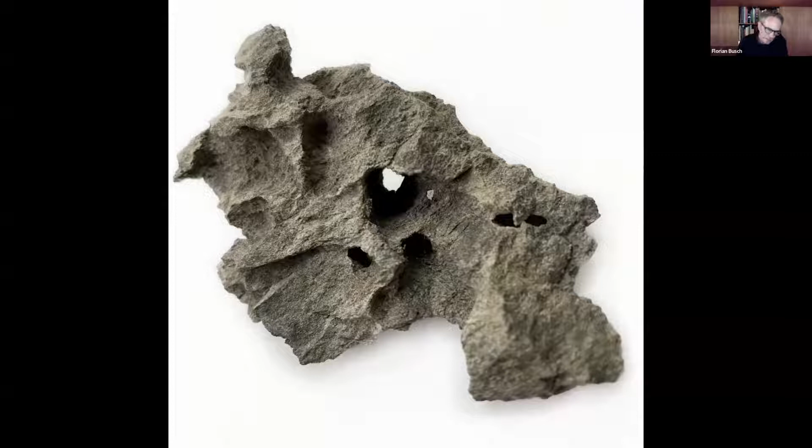Biology has become indispensable for architecture. Architecture has also become indispensable for biology in mind. And just looking at these images of a stone, of a coral, of a wasp's nest, or of the architecture of soap bubbles, you may be beginning to spot the tendency here.

The title was kind of a spoiler: formation, from form to formation. The processes of formation in these four instances that we just looked at are becoming quicker and quicker. Stone takes a long time; coral, wasp nest, soap bubbles are forming. For us humans, we can observe them live. And what they all share is this aspect of time.

And that is something that the conventional, let's say, conception of architecture usually does not understand or does not include. People look at architecture as an object. It's a house, it's a building, it's a church, it's a museum. That kind of very limited conception of architecture is baggage we have to leave behind us and look at these processes.

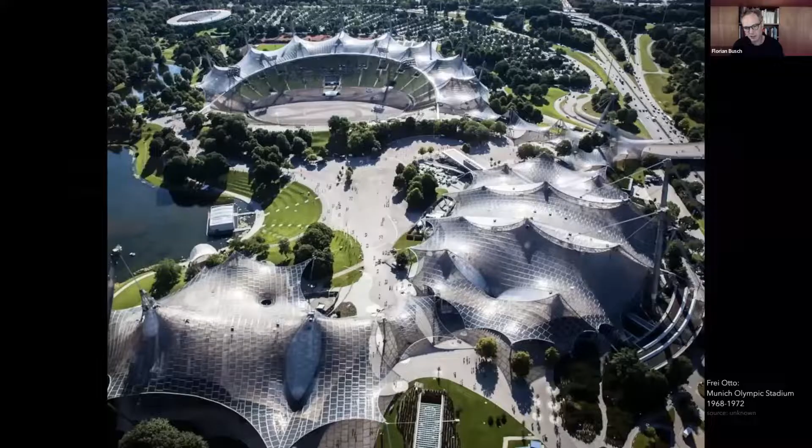And Frei Otto is famous for the Olympic Stadium in Munich, for the Olympic Games in 1972, which is often seen, and I'm one of those proponents, as one of the best examples of post-war Germany. You have to juxtapose this kind of structure to what the Nazis did in 1936 in the Berlin Olympics, where the idea of humans who dictate as absolute rulers and who impose their limited thinking on something, especially in Nazi time on human beings, but it goes back to absolutism, compared to nature, hilarious hubris.

And then this takes that to something completely different and shows an open society in post-war Germany in this kind of structure. Absolutely fantastic. And again, architecture is a process, as you can see, and this is based on very, very simple rules.

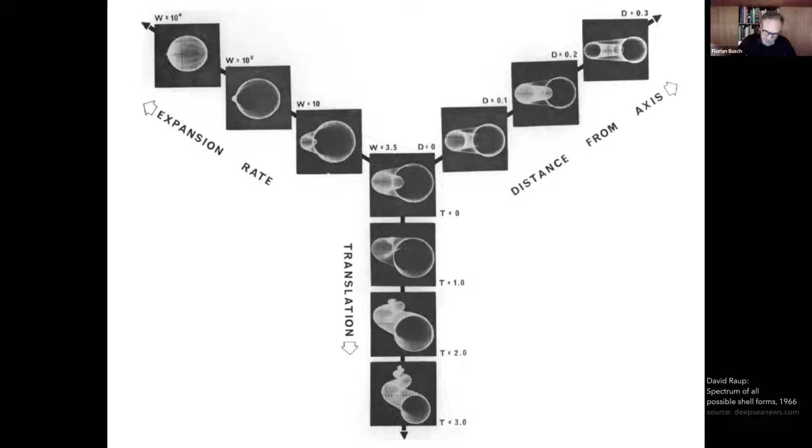The first parameter, which we don't see here, is actually the shape of the generating curve. Then the distance from the axis is the D. Then we have the W, which is kind of the expansion rate, expressing how much the tube's diameter increases as it spirals. And T is the translation. So how much does the tube actually move vertically? If it's horizontal, then how much does it go up?

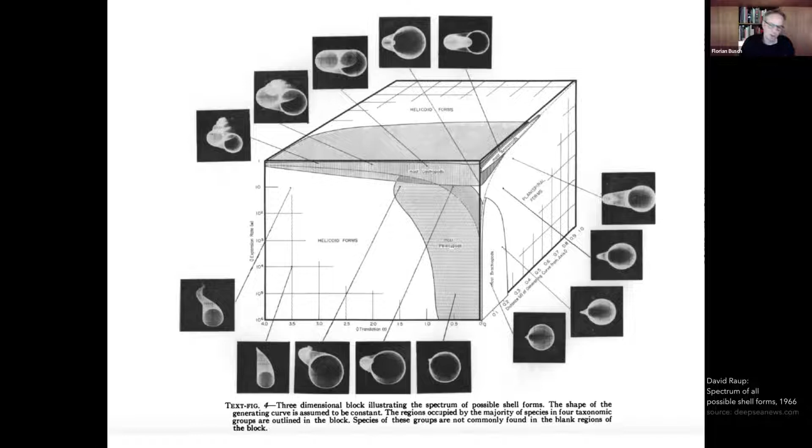And then he made this amazing space of possibilities, calculated any helicoid that is actually possible, and then mapped in this space of possibilities what has been found to exist in nature. And you can see in this hatched area, it's a relatively small part, and then there are these mathematical possibilities which nature has not yet explored, or we have not found them. Jump a little bit.

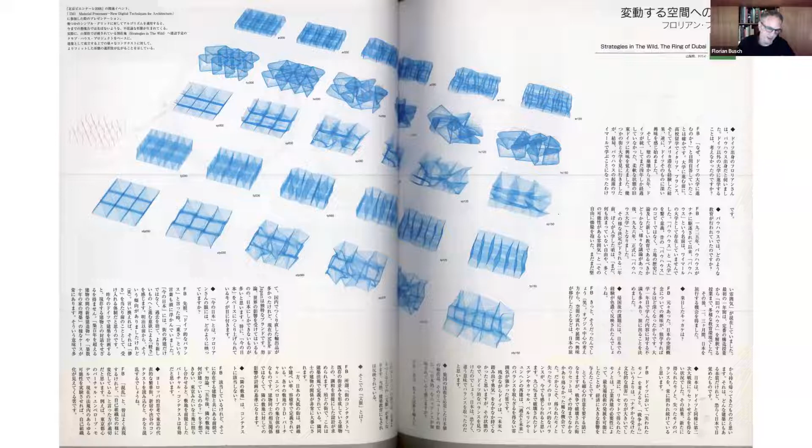This is something I did in the very early days, 2008-9, as I was opening my own office, which is, in all its humility compared to the helicoid complexity, an attempt at doing something like that, where you have these parameters. You can see on the very left here, for example, a set of curves, and in this case, they will be straight. They're slightly similar to this first parameter of David Raup, and then you go in this direction, let them rotate, and come out in all of these kinds of potential spaces.

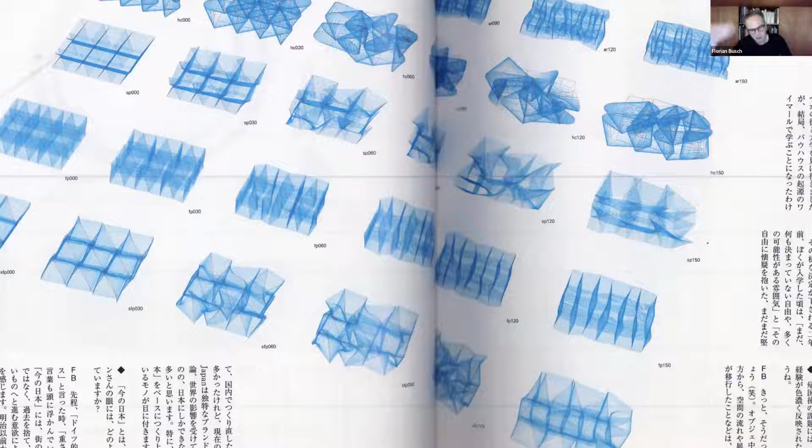Obviously, architecturally speaking, or for certain use patterns, most of them are completely useless. But what you're doing is generating a set of potential spaces that are capable of far more than you could have preconceived. And then you can make a selection and restart the algorithm to move forward.

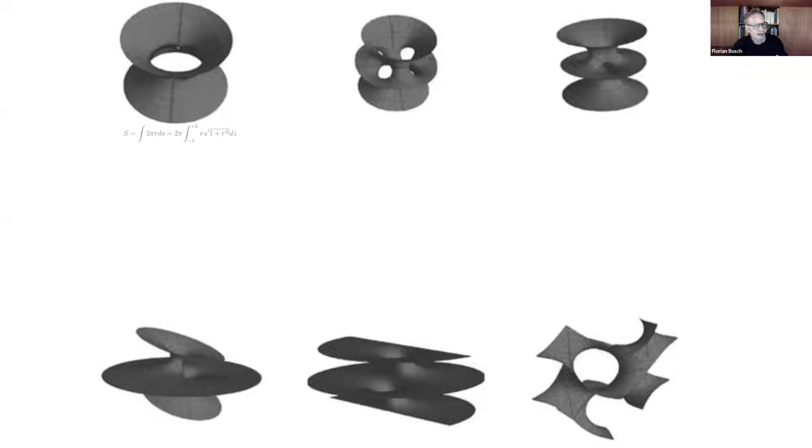So let's go a step back towards these helicoids on the bottom, or catenoids on the top, and the mathematical pure optimum. It becomes really interesting as humans, I think, when it gets dirty, when the necessity of the actual context kicks in, and you are moving away from the mathematically perfect geometry to an exactitude of topology, where it's completely exact in itself, but can respond to the actual context.

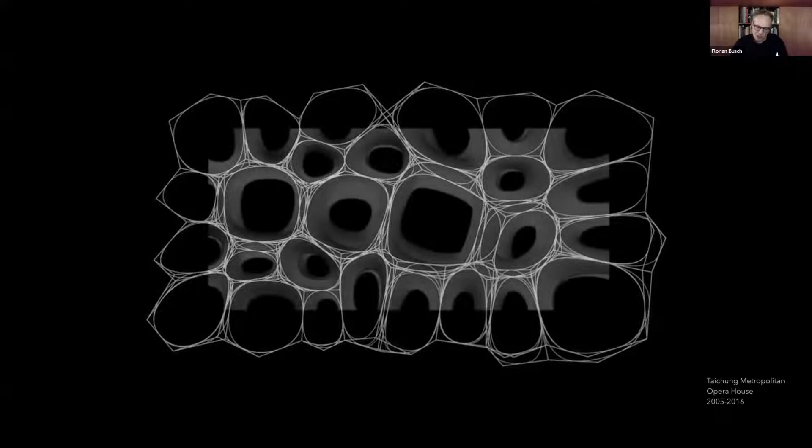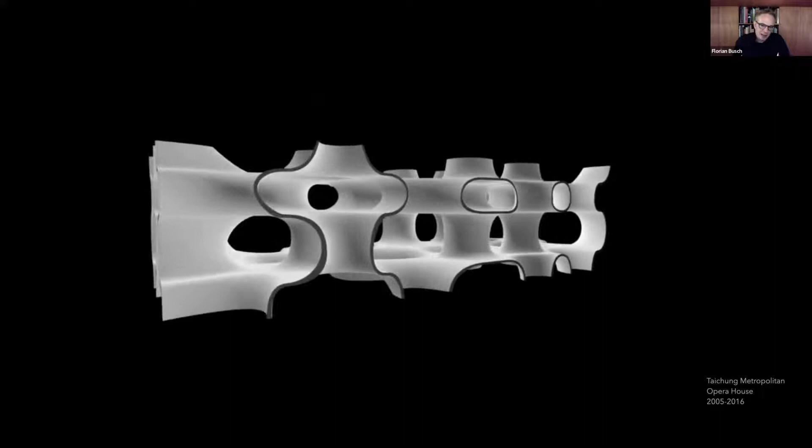This is a project that I worked on when I was working with Toyo Ito, an opera house that has been completed now. It's shown as it was at the time of the competition, where we used a very simple set of rules to start with as a thought experiment, so to speak, dividing this in a checkerboard and connecting it.

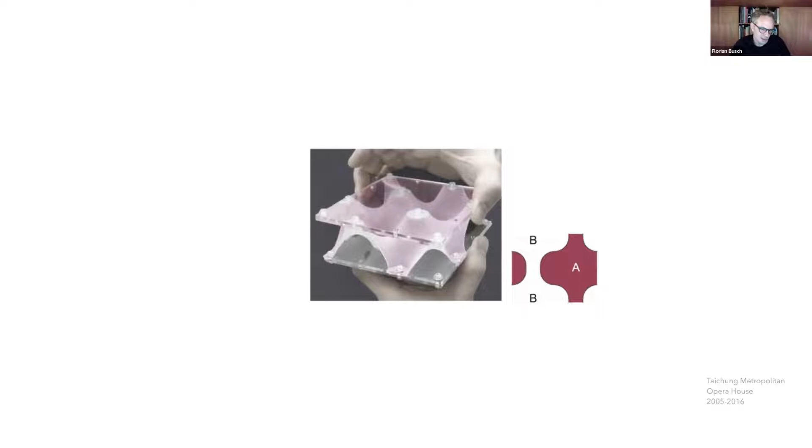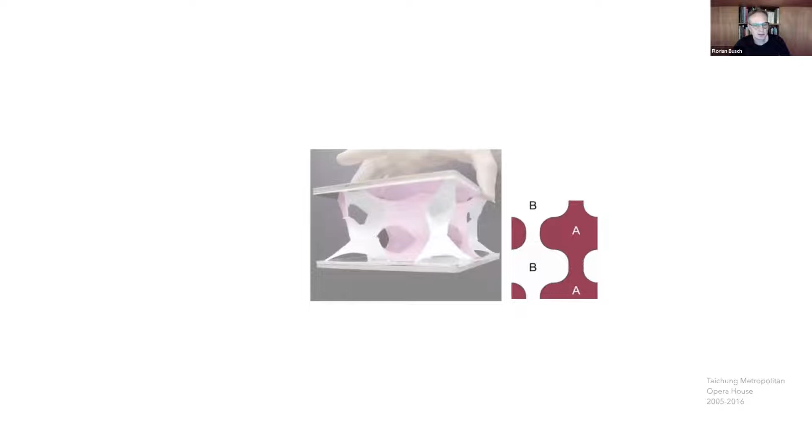And now you can maybe connect the dots to the Frei Otto introduction, a pure mathematical minimal surface that you get with a membrane. And if you start to stitch more together, you end up with these spaces separated by this membrane, separated but continuous spaces, so pink and white.

And if you look at it in plan, it's very, again, simple, but then the necessity to respond to context, in this case, program, the urban context, the functions, the program, it's an opera house with larger spaces, smaller spaces, and so on. And you kind of see how the form is not something we could have preconceived, but it is a result of a long process of formation.

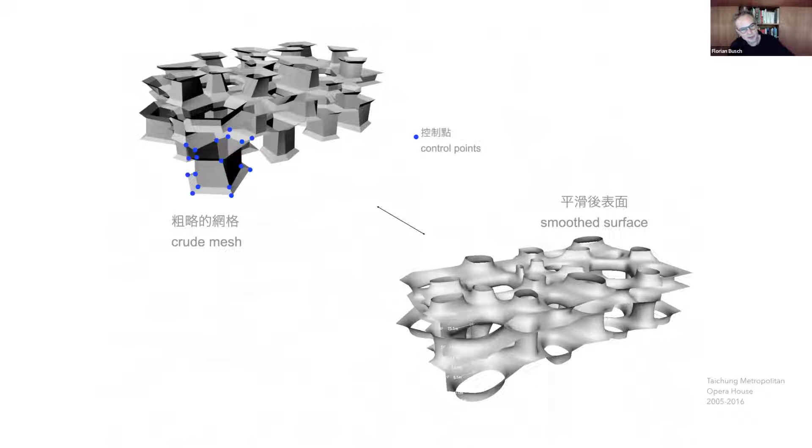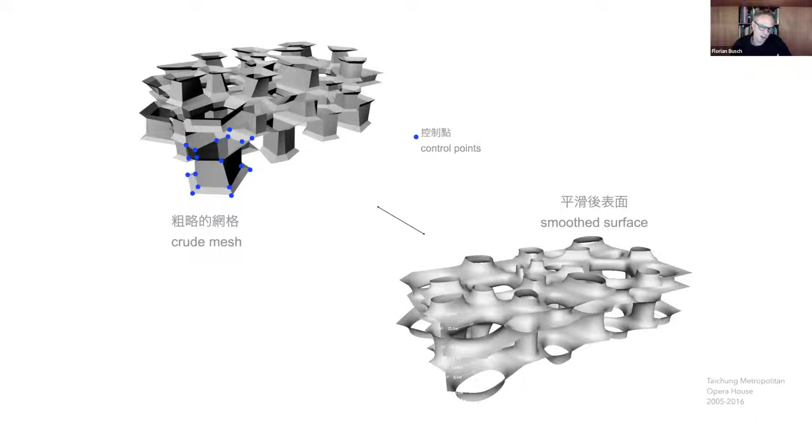The digital help, the computational powers, are extremely necessary. It would not be possible. I think this would even not be possible with Gaudi's methods. But it is through something that we humans can kind of get a grasp of, which is on the left, which is somewhere around 400 to 500 control points for this entire structure, which, by the way, is about 22,000 square meters of surface area that you're looking at of this structure. And then let the algorithms under the hood in real time smooth that out. Yeah? So you're looking at a smooth surface.

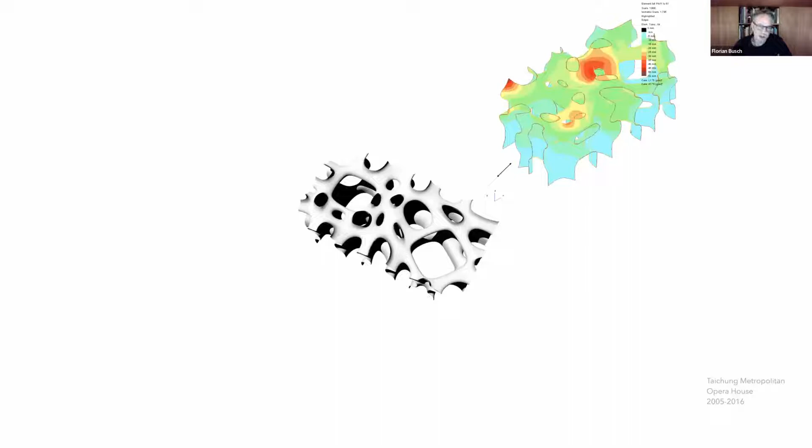And so the eventual outcome is responding to structural input, to acoustic engineering input, to building environment, building physics input, and also, very important, to input from construction. How do you actually build this kind of feedback?

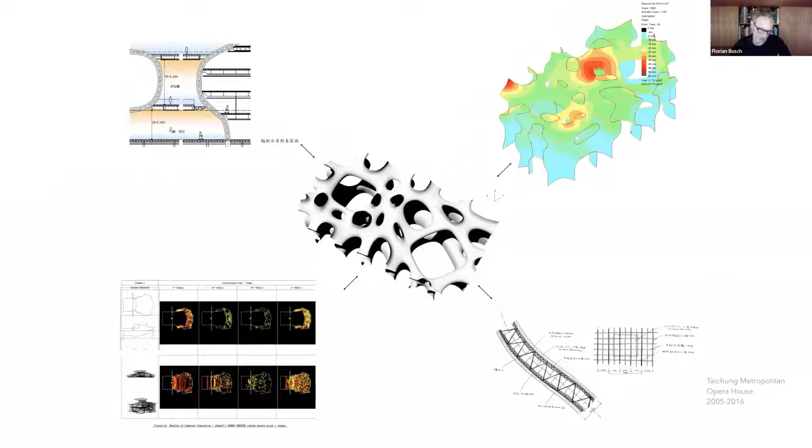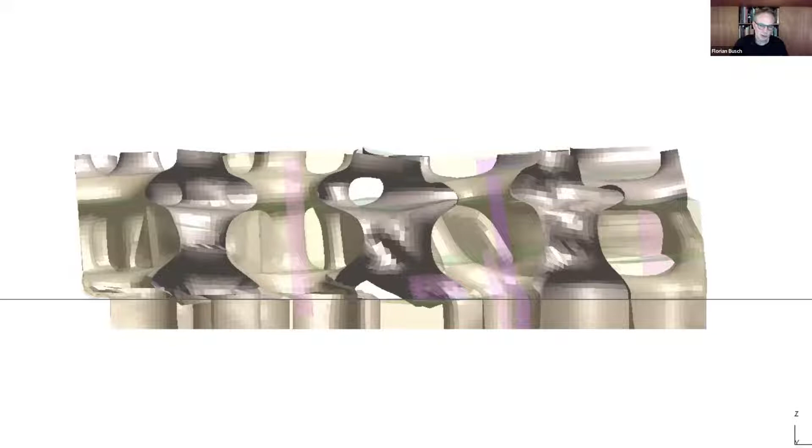And just one of them is a crash testing, again, just to show you the potential of what computers do. This is an earthquake simulation. The building has to be designed as it is in Taiwan to withstand a maximum credible earthquake that could happen every 2,500 years in Taiwan, which is quite a big one. And in this case, that's the crash test where it goes beyond repairability, but you would still be able to evacuate. And that's the construction site as it was in 2014 of the Grand Theater.

Now, this is just a screenshot of what's going on in the computer, and the project is really constantly developing in a web of relations. And you can literally have the computer actually draw a diagram of any project that we are doing. And if you zoom in there, you would see the different nodes, what they are. Yeah, so this material, or this geometry, and so on, and how they relate in the entirety of the project. So the project develops not in terms of matter and form, but through continuous variation of material forces.

And I think this is key to understand, and hopefully you remember the two sentences which started this talk. Yeah, so biology and the relationship between geology and architecture. I want to run through just a couple of examples that we have been developing over the years. This is already 10 years old, a project that unfortunately was not realized.

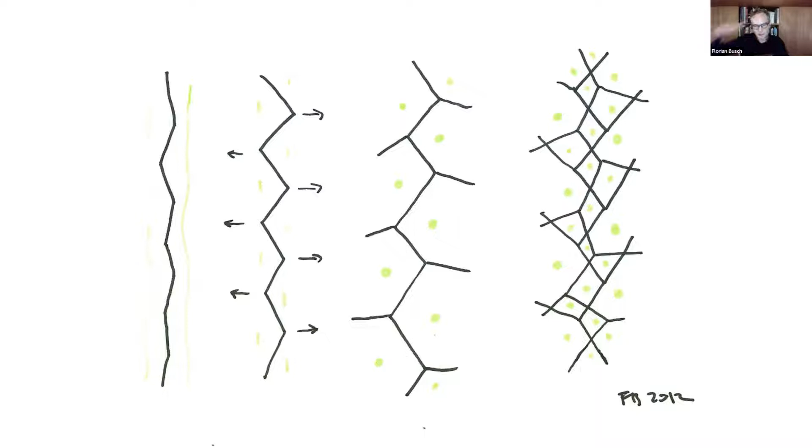Their main benefit is the capacity to self-shade, so the tree itself provides shading, and it has a very clever mechanism to shade. And we were trying to translate that into an architecture that could behave in an analogous way. So instead of having the conventional high-rise tower, we first of all turned it 90 degrees, so it's on the ground, and instead of having a wall, we let it branch out, and then let it start to build on top of each other to provide areas where, no matter on what balcony or what terrace you are in this building, you always have a certain amount of hours of shading, and that was the key to this process.

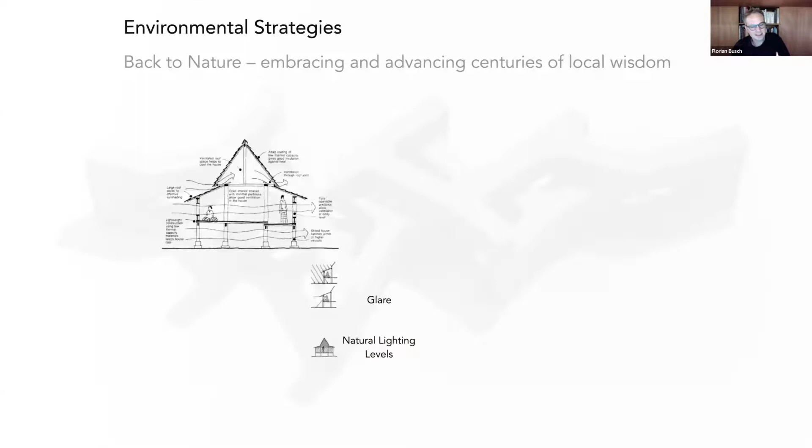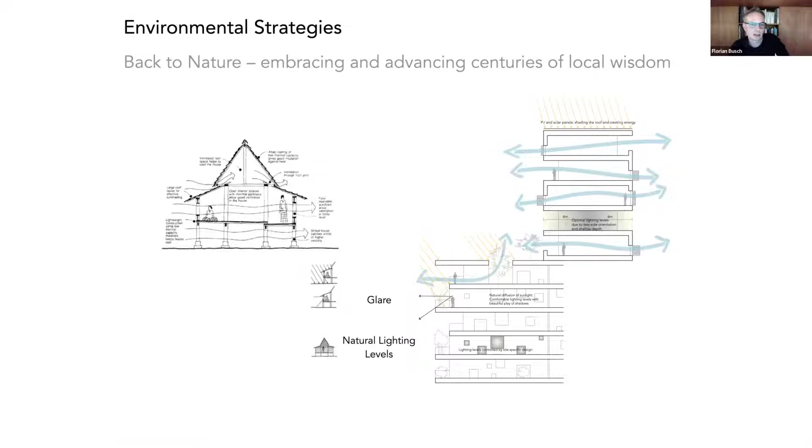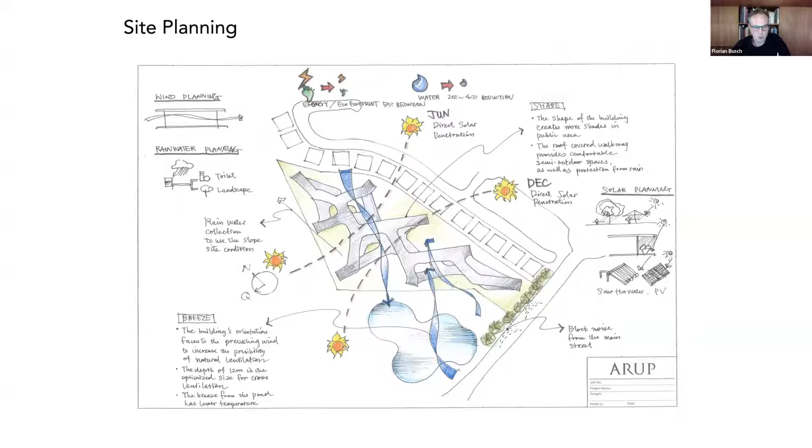And incidentally, it's of course learning from what people have been doing, the vernacular architecture for hundreds of years, if not longer, in the East Tropics. So we made the building very, very narrow. It's only, at the maximum, I think it was 14, mostly 12 meters. So every unit could have cross ventilation, and we worked together with the engineers at Arup to really think this through, to not understand the building as an object, but almost like a plant, as an organism where all parts work together.

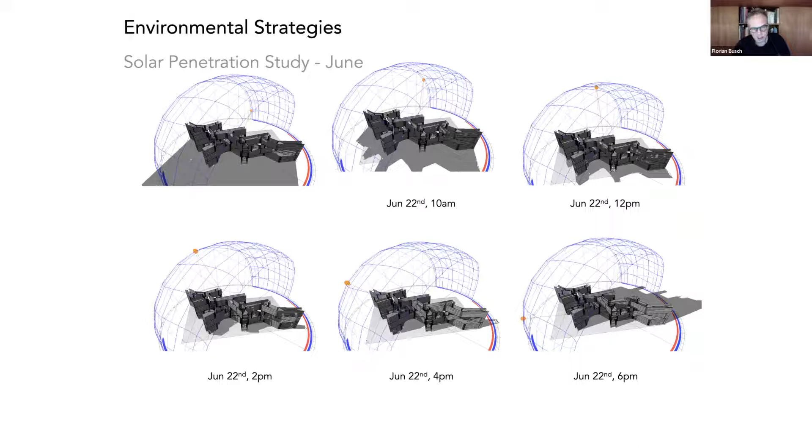And I mean, this is absolutely no longer cutting edge. This is what you do with almost any project right now, no matter how small or big. We analyze it for solar penetration. We analyze it for wind. So in this project, it was very important that we would have enough wind for breezes, but not too much, to get the right amount of what is considered a comfortable space without air conditioning.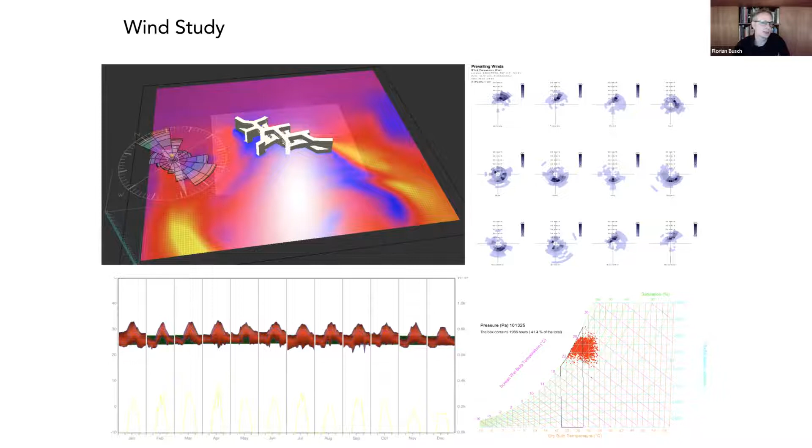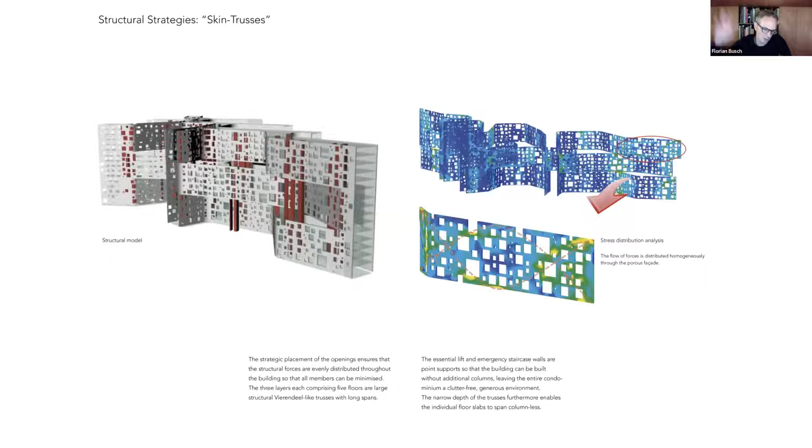And of course, structural. How can we lighten the structure, even though it would have been a concrete structure, but to make it as porous as possible and still be able to, within that porosity, have the forces find their own ways to be carried down. And that was the idea of the outcome. So you can see that instead of having 15 stories, we have 5, 5, 5, and we have a very complex, but in a way consistent project.

Let's go back 7 years later. This is a project that is in Jeddah in Saudi Arabia originally, but over the months and years kind of expanded to become a potential project that could respond to many places in the world. It's called the IBDA terminal, which is not really a terminal for an airport. It's a terminal for people, for young entrepreneurs, artists, researchers to come together and have spaces where they can open their own studios, their own offices, but also benefit from a vast amount of infrastructure for the creative process.

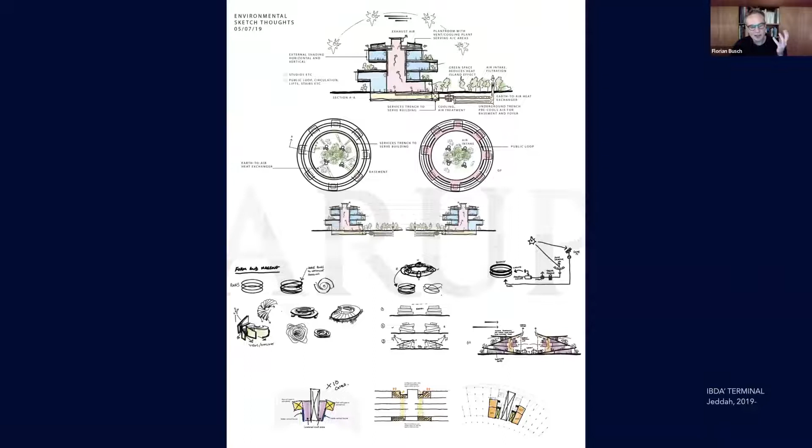And this is just an idea, but how could a facade react? So we need something that can open and close, like the petals of a plant. But if it's built in many places where construction technology may not be so advanced, it has to be very primitive elements. And so we chose these kind of primitive louvers. There's a couple of thousand of them, and all they can do is rotate, open and close. So when the sun is shining in, they would close, or close to an angle where there can still be indirect light, and when the sun is gone in the afternoon, they open and let in the light, and so on.

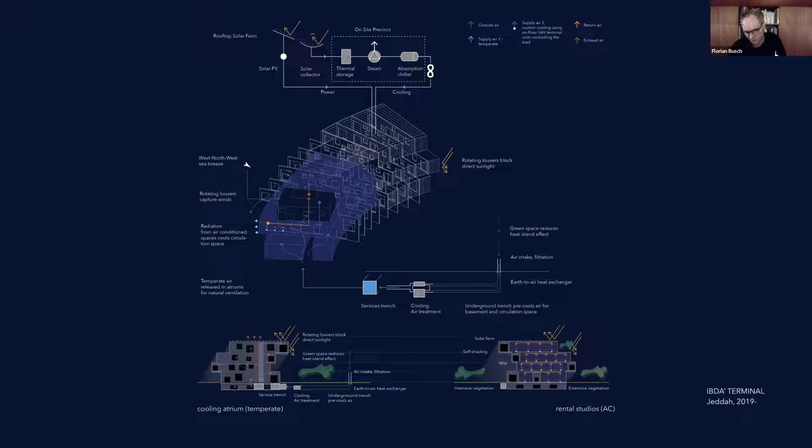So the building kind of breathes during the day, and those overhangs that you see around the building also provide an initial state of maximum shadowing where possible. So again, the building behaves in relationships as a network, to avoid material, to avoid cooling cost, or heating cost for that matter if it's built somewhere else, and at the same time is trying to provide an ideal environment for the people who use it. That's the purpose of doing this.

So if you think about a research institution, or in this case an institution where a lot of people come together, the driving, or let's say the most important part of the creative process is when people bump into each other, and mostly when these are accidental encounters. So we provided the most amount possible of public space, which you can see at the top in these white areas. There's a public loop all over, always in the inner place, which is like a garden area, and we really want people to almost be forced to meet people that they have not necessarily met before, or wouldn't meet otherwise.

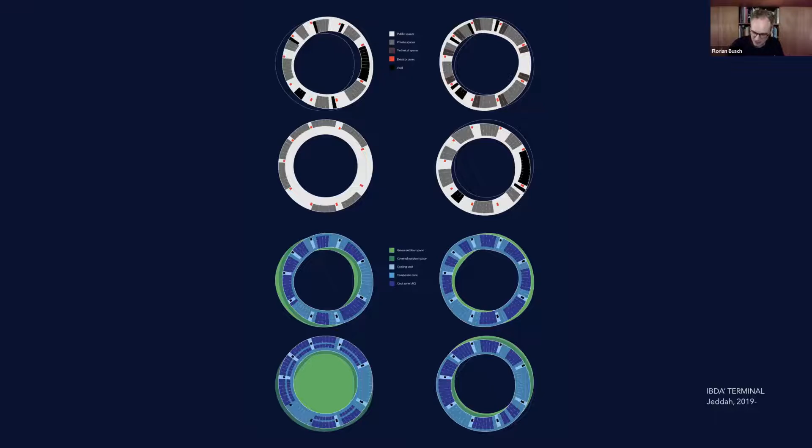In section, as a plan view of this, you can kind of start to understand the scale. It's quite a big building.

It's very generous spatially, and this garden in the middle is, of course, almost like an oasis situation where we have a different climate, which again, also through engineering prowess, we're kind of sucking in the air, which is slightly cooler than it would be on the outsides, which uses the vegetation that you could find in Jeddah in this case,

and here we can have vegetation that would not grow on the more arid outsides, but here there's more humidity in the inside, and it kind of enhances the climate of the building as the air is sucked in and spread into these cool voids, and led to minimize the amount of energy that is needed to cool the building or have climate control in the building.

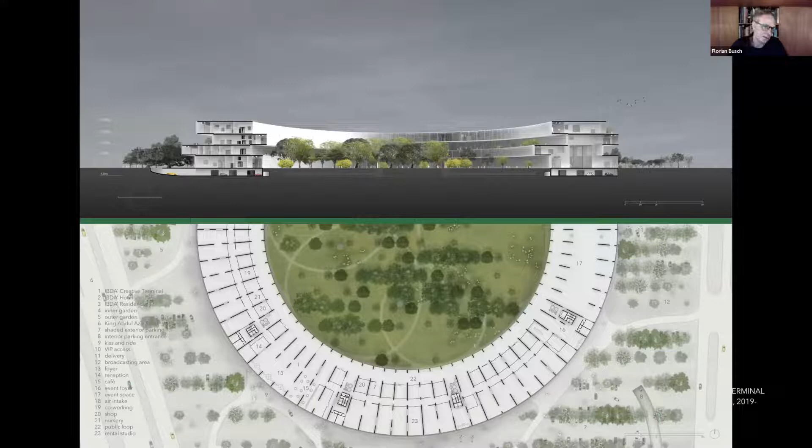And these are just jumping through the floor plans, and there's a vast amount of program, different kinds of program. But let's just look at the structural aspect again to see how computational means, in this case structural algorithms, are helping us to not only make it realizable, but also to make it feasible for many parts in the world where construction technology greatly varies.

So we are looking at, in this case, a structural algorithm. Again, this is developed with our team to have the minimal material effort, as you could see in birds' wings, for example, and at the same time we are making it buildable and affordable. To build something like this would be extremely difficult and not affordable. Building something like this is much easier.

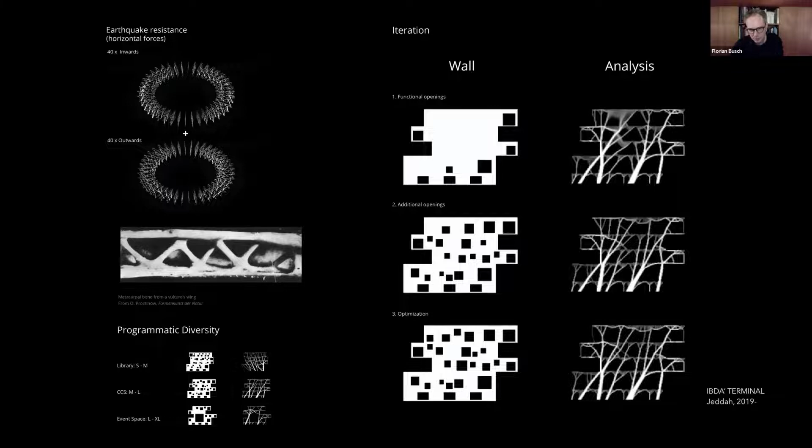And if all the program, all the functions that need to go in there, can be afforded by these kinds of structures in the middle, then that's absolutely the best outcome. So this is a mix of structural algorithm and the actual structure.

And as you can see, with these openings, there's kind of a feedback process between openings that we need and openings that are possible. And once they're in there, then the structural forces, which you can see as literally a force diagram, start to find new routes. So there are several iterations that go through that. And that's kind of there in this structure.

There are 80 of those structural walls, and you can see the structural diagram on the left and the way it would actually be built on the right. Yeah, and that's kind of how it would look on the outside, and from the inside looking into the outside, and see how.

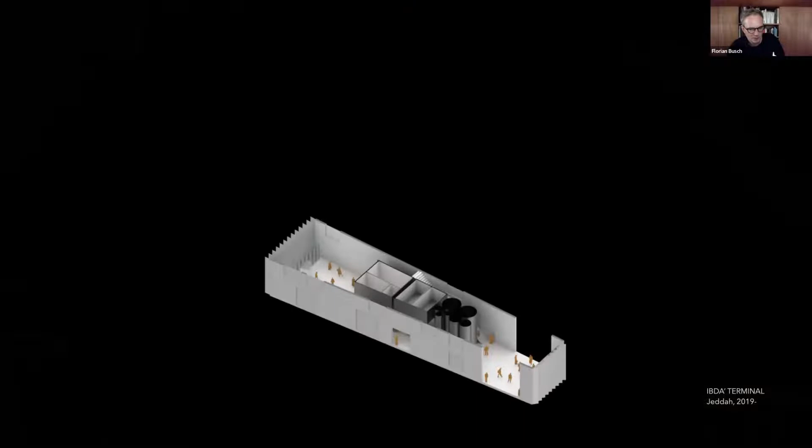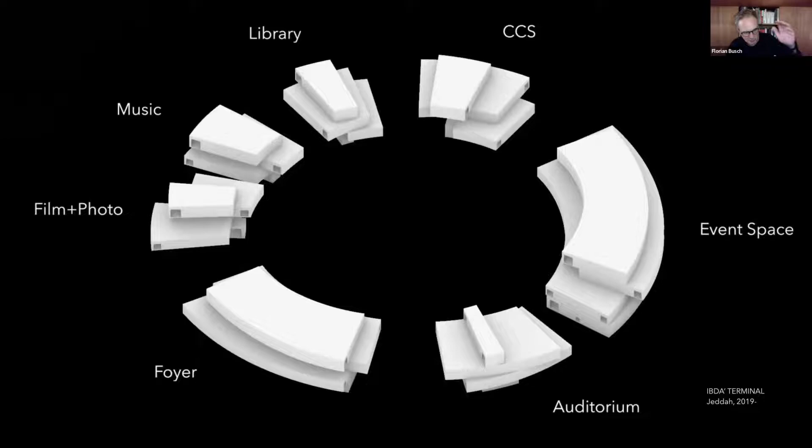There's some of the program that's in there, different types of auditorium, music, event hall, etc. That's the library. Yeah. And that's looking from the library into the inner garden. And at the very far, on the horizon, you can see the city high-rise buildings in the distance.

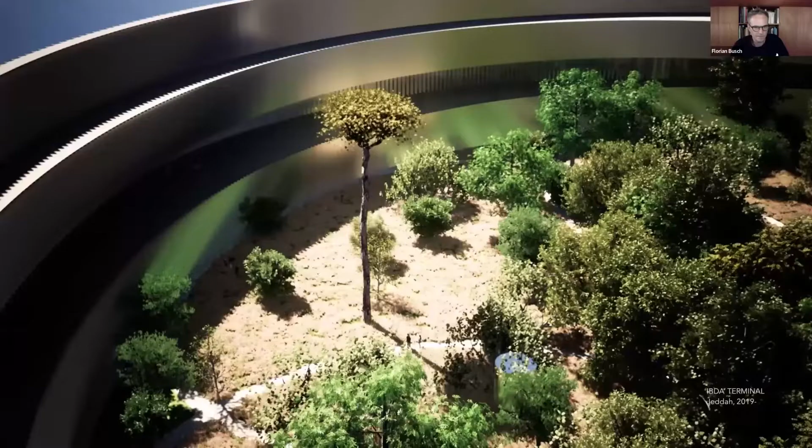And so let's jump a little bit to a completely different approach, or use case, of how we apply algorithms, computer technology, computational means in our design process. This is literally what it says, landing on a small island. It's actually a group of islands in the Philippines,

and the client needs to build an airstrip, because there are very high currents. It's very difficult to access this group of islands, and on one of them he wants to have an airstrip to land planes. And so the first thing is that we are using drone technology to generate a point cloud of this island. As you can see, this is 4.9 billion points, which is kind of the limit of the computational power that we have at the office.

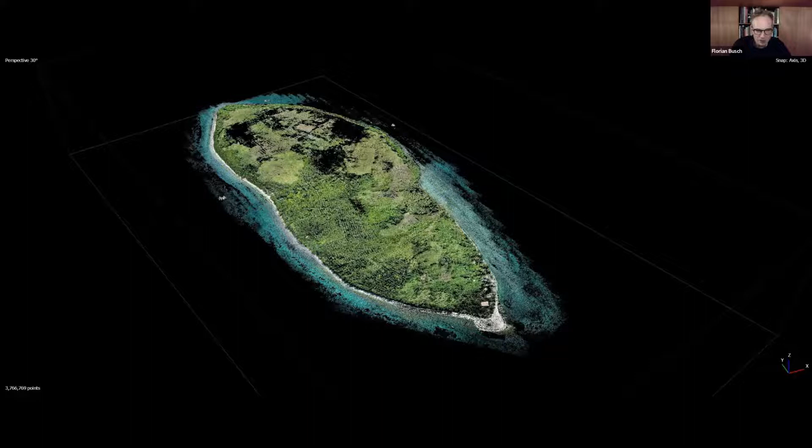But we can reduce it, and then we start to introduce, with a machine learning algorithm here, some areas where the computer tries to interpolate these black areas that you can see, but it's still at a resolution that is sufficient for our means, because what we want is an airstrip with a length of 1,200 meters to land, and more difficult, to take off a certain range of planes.

And it should be 60 meters wide, and the maximum gradient that you can have for airstrips is 2%. You can probably measure the island and say, okay, 1,200, let's go. But if you have the means to analyze that with what we have here, we can set the goals to have a minimum amount of soil that needs to be moved, mostly to save costs, but also to save as much of the island as possible, of course. And the minimum difference in cut versus fill.

So you want to ideally just use a couple of bulldozers and put the soil over from where there's too much to where there's not enough, and then that's it. And it's based on a geometry of a 5 meter resolution, which is enough for this purpose. We can of course go down to make it more accurate, but that's kind of how it looks in 5 meter resolution.

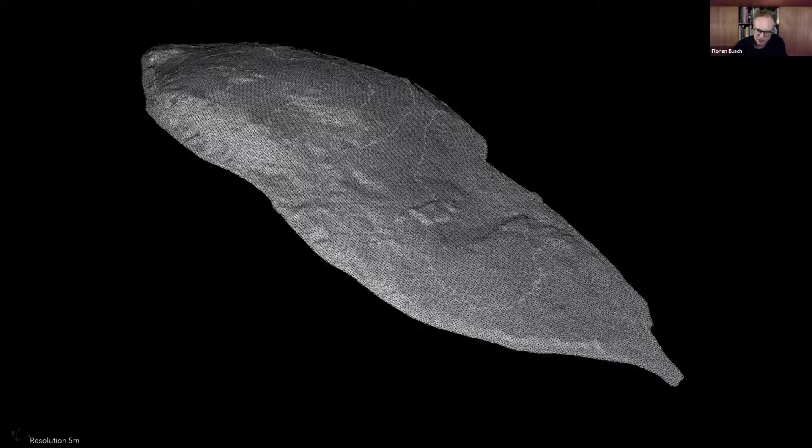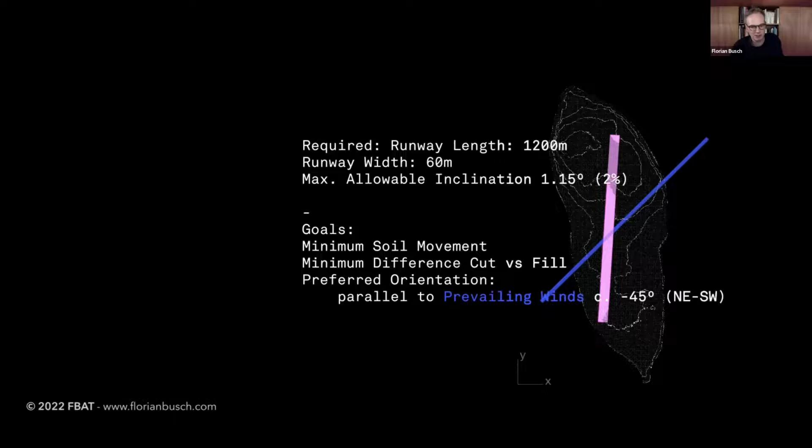airstrip, 1,200 meters, and the prevailing winds are unfortunately in a direction that we cannot have at 1,200 meters, but we can try to be as close to that direction as possible. And that's kind of how we set up the algorithm. This is using a parametric software where we can have an evolutionary solver, like a genetic algorithm, to find the optimum under these conditions.

So we have an initial population of 200, as you can see in this left rectangle, where the white ones are going to be selected after the first generation, and the red ones are those that will be eliminated. And every following generation has 40 offspring, and in this case, we have 4 parameters.

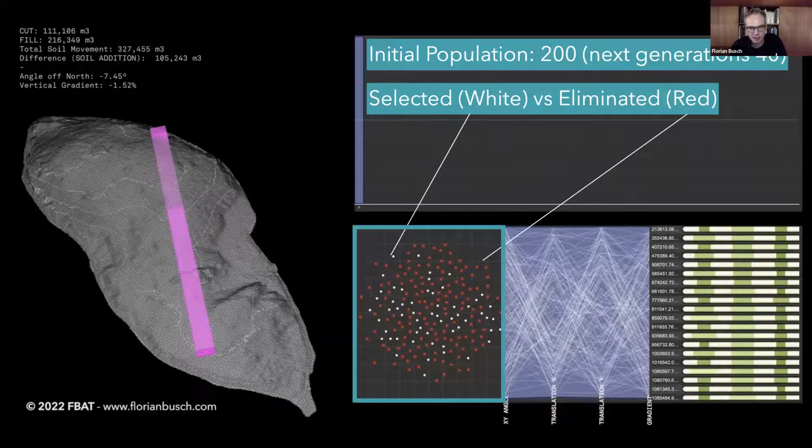This pink area can rotate in XY. It can move in X. It can move in Y, and it can adjust the gradient within the boundaries that we set, so plus minus 2%. And the field of parameters is what I just explained.

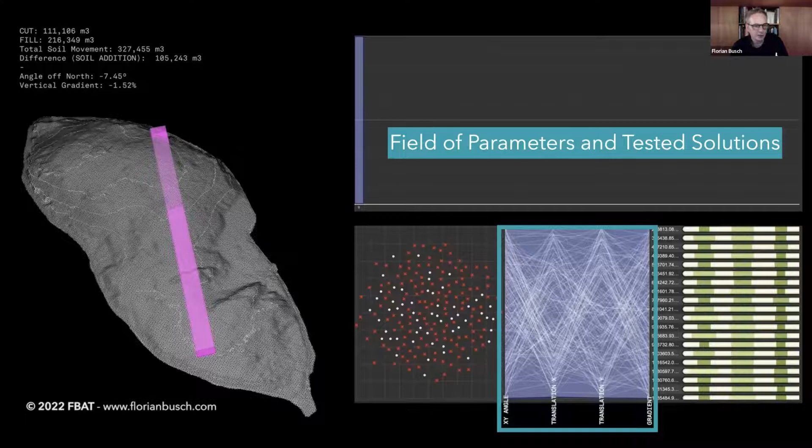After the first generation, you can see that the algorithm tries any of the possibilities, sometimes even moving the airstrip partially outside of the island, but then it corrects the mistakes. And this is kind of the active genome ranking. So you have the best numbers on the top and how these parameters are at this certain state.

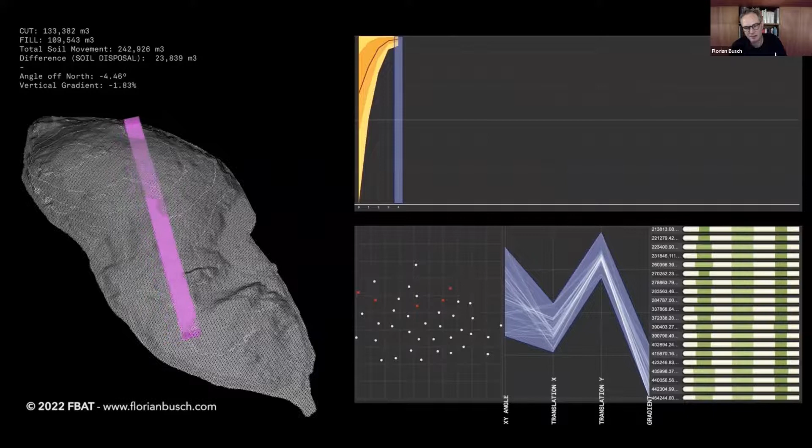And if you let this run, you can see that after the first generation, the algorithm finds a tendency. So this graph is where those parameters are approaching an optimum. I think we had in the beginning a difference of 105,000, and after only 8 generations, we are at 4 cubic meters difference, and the total soil movement is at 200,000 cubic meters, which I would assume is very, very close to the ideal, even if we let this run for days. And that's kind of the way this works.

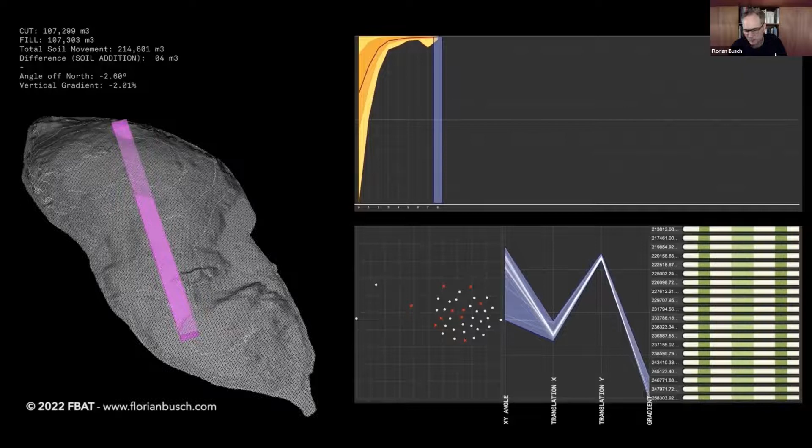So we have an n-dimensional space of possibilities to search from and optimize, and it's an extremely powerful tool that is at our hands. And just to give you another quick insight, again, something that you may not expect architects to do. It's a mountain retreat somewhere in Colorado, and the clients want to study the feasibility for a ski development.

So we are using the topography at the best resolution that we have. In this case, we have a LiDAR scan of this area, which is up to, I think, 20 centimeters precision, or even better, which is overkill for this study. We're using an interpolation of, I think, 1 or 2 meter

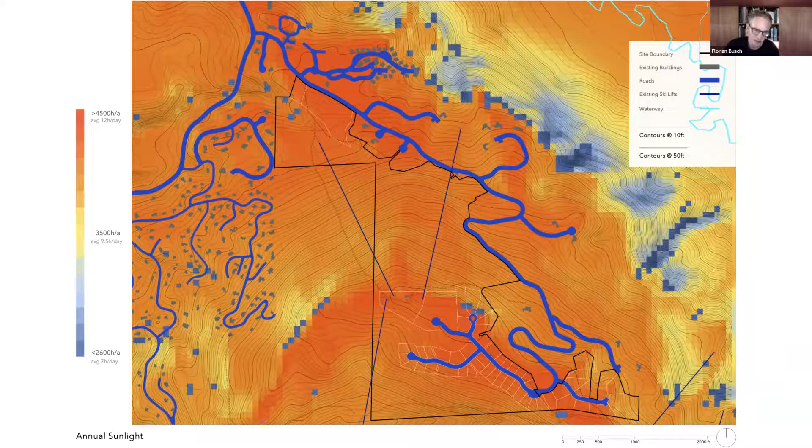We have algorithms for annual sunlight analysis, again, to find the ideal orientations, the ideal locations, and if you superimpose that with the trees that we are going to keep and so on, to get strategies where we would like to place potential buildings.

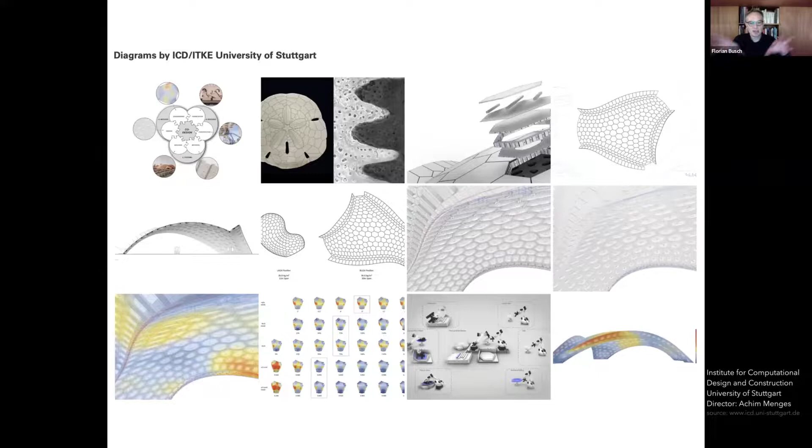They are doing cutting edge stuff, emphasizing the materiality, and what I said in the beginning: material is not something that we work despite of or against, but trying to understand what the material can do, the performance of the material, and make use of that. And they are having some extremely interesting projects, and it's definitely worth checking out.

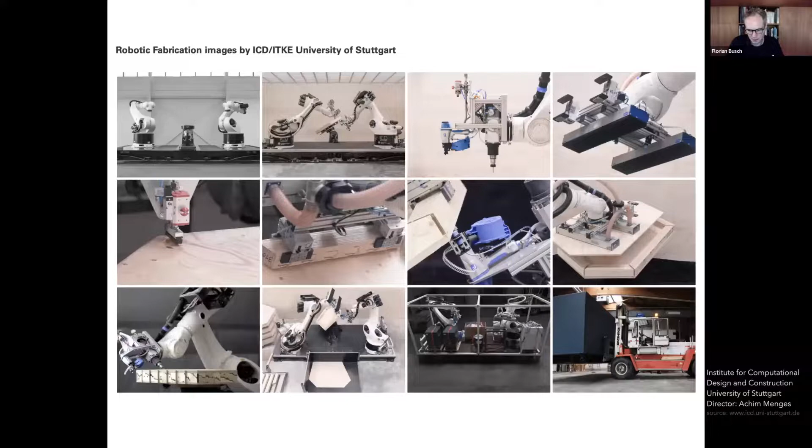And unfortunately, again due to the construction industry, it's very sluggish. Of course, there are a lot of safety issues as well, but it's a very slow process to get something to the level of large buildings. They are doing these beautiful, extremely intelligent, lightweight, effortless pavilions, but I hope that my humble efforts will also lead me in that direction, that we will be part of creating a better future where we are making much more clever use of what's around us and the nature that we are part of.

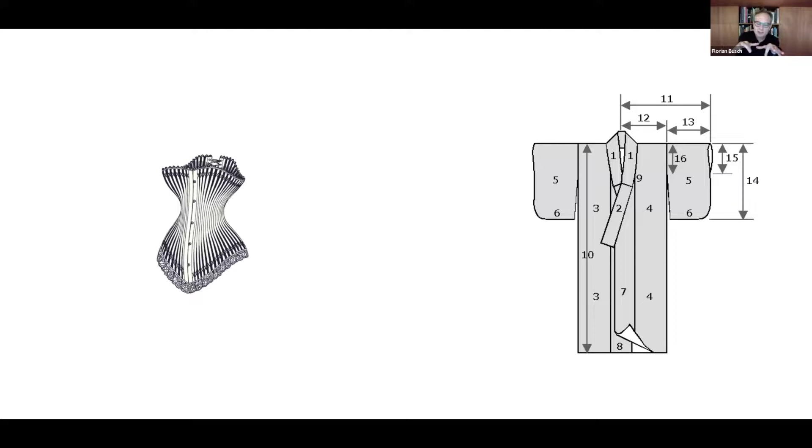And since we are in Japan, I think we are still in this kind of idea of the corset, that we have an ideal of what a shape should look like, and we create this kind of strange corset. But the more elegant way would probably be to act like a kimono, from katachi to keisei, or from form to formation. And I think that should be the goal of all our efforts.